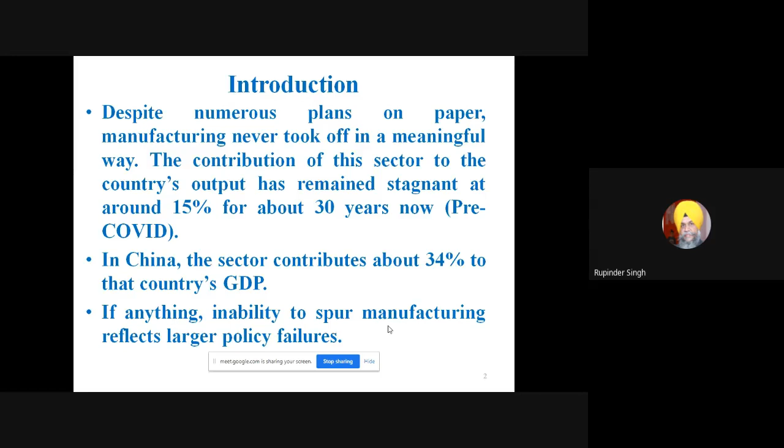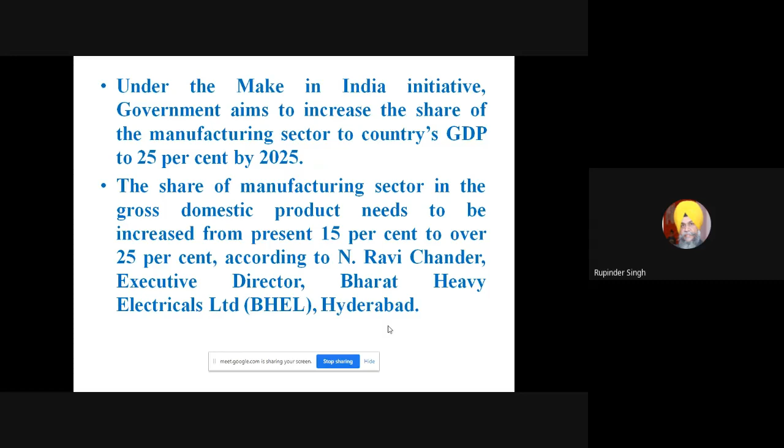To address this problem, in 2004, Government of India set up a National Manufacturing Competitiveness Council, and the idea was to increase the contribution from 12-14% to 25-35%. If you see the website right now also, the target is 25% by 2025, right? If we increase this contribution by 10%, it is expected that there will be 100 million jobs for engineers. Not only the government, but even the public sector and even the private sector people, they are saying that we have to increase the contribution of the manufacturing sector. Like one quote I have mentioned, from N. Ravi Chander, who is executive director of BHEL Hyderabad, he expressed that the contribution of the manufacturing sector must be increased from 15% to 25%, right?

But there are some issues. Let us understand. We have problems in infrastructure, with respect to finance, with respect to land acquisition, and labor law issues. Because of these hindrances, the big players are not coming, and we have a problem in investment.

Now this is the key point from where the further discussion will move. We are interested in some innovation. It may be through design, or it may be using some tools like 3D printing, which can help in product development or process development.

If I am developing this product first, I am developing the process first. This will help me in getting a lion's share in the market. Now let me give you one example before we actually start the business of 3D printing.

In our country, a lot of people move from one place to another for religious tourism. If you go to any of these religious places, you will see a lot of products that we want to purchase as souvenirs, as tokens of remembrance for our near and dear ones. This is a big business, and most places you go, in the pre-COVID period, most of the products were Chinese made.

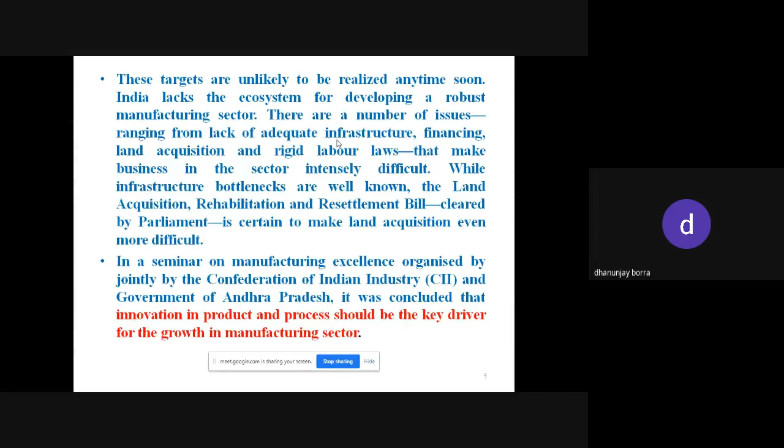Okay, so we were discussing. This is one of the data points I want to share with you. If you see the Thomson Reuters data, this was published earlier in 2014, and I have data up to 2020 also. We are contributing just around 5% to research as regards the international requirement is concerned.

Whereas China, Korea, and Taiwan are much ahead of us. Similarly, we say that we are good in CSE, but the contribution is again less than 2.5%. This is from a third party survey.

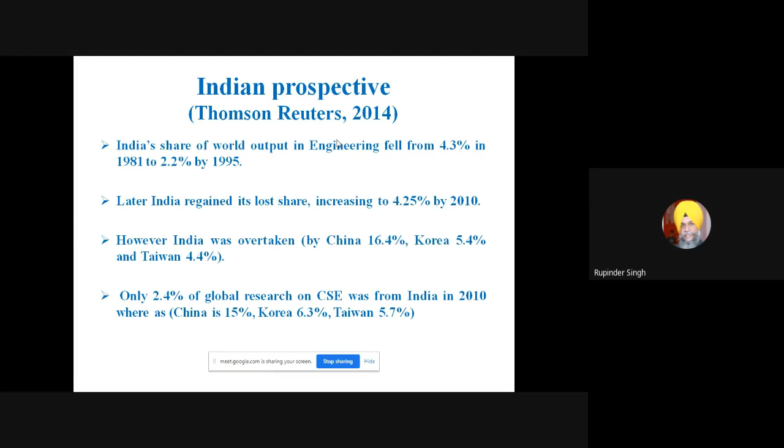So what we need to do is a lot of market research first, and then product development, prototype development. Then those persons in those particular products or industries will have a lion's share, who will launch the product first. So that is the idea of doing this.

Now, rapid prototyping can be one of the tools, or rapid manufacturing can be one of the tools, for helping me have a lion's share in the market. This is not a new concept; people have been using rapid prototyping since a long time back.

This is broadly classified into three types. I have taken this from the Chang and Chua paper, 2005, Journal of Advanced Manufacturing Technology. Rapid prototyping has been divided into three categories: additive, subtractive, and a combination of additive and subtractive.

Under subtractive, CNC machining is of course a highly established process. Then on additive, you can have a liquid based, powder based, or sheet based technology, and under these different categories, a number of commercial technologies are available. For some typical applications, we may also think of combining additive and subtractive processes.

So people normally ask, what will be the future of additive manufacturing? Somebody says that after 5 years, there will be a total shift from subtractive to additive manufacturing. But there are many good papers saying that both processes will go hand in hand, because even today additive manufacturing processes are still not developed enough for mass production activities like subtractive manufacturing. But in the automobile sector, it is expected that in the next 5 years there will be a big shift from subtractive to additive manufacturing.

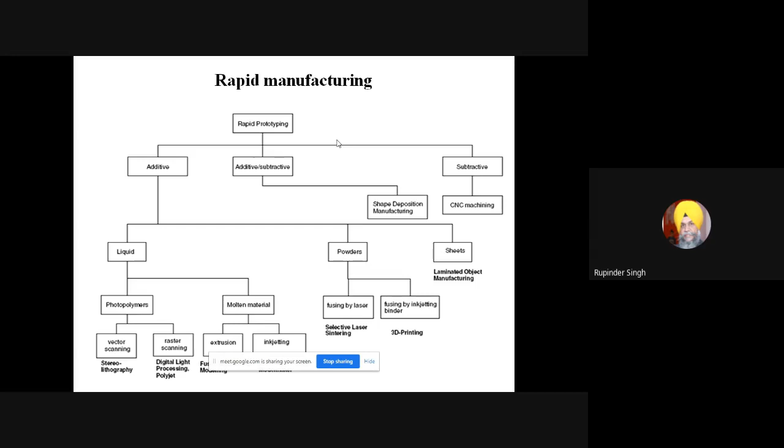My aim for discussion today is not to describe a particular technology, but to make this technology low cost as regards local needs, and the indigenization of the technology. All these technologies have been developed in the foreign world, maybe in parts of Europe, US, or other developed countries. But how can we make these technologies more customized and low cost, so that they can be really useful for local industry and local people for low cost manufacturing? That is the main aim of this discussion.

So basically, this is a method where I can make physical objects constructed by depositing material layer by layer. We have computer control data, a CAD file, which I transform into cross sections that are still virtual, and these are created in physical space one after the other till we get a finished model.

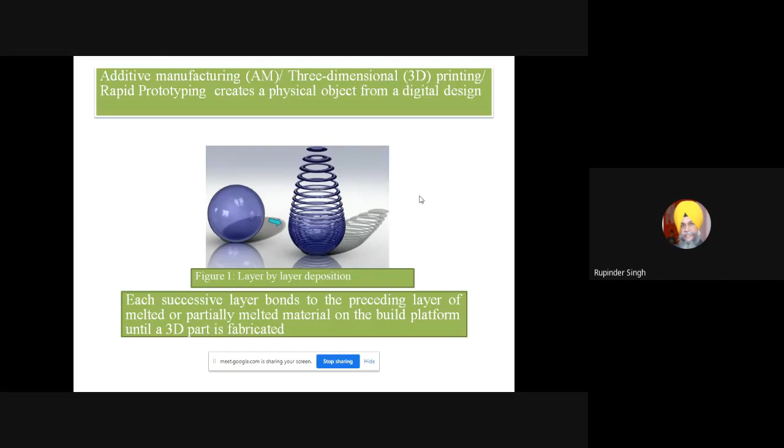So this is another way to represent it: layer by layer deposition of material, and finally I get a 3D printed part. Each successive layer bonds to the preceding layer, which may be melted or partially melted, on a build platform, till we get a 3D printed fabricated part.

Now let us think of the extension of this, which is 4D printing, 5D printing, or 7D or 9D printing. What can this be?

I have a technology through which I can print a 3D part. How did 3D printing actually start? If you look at the history, commercially people started developing 3D printing using an inkjet printer. In an inkjet printer, I have a nozzle, and from that nozzle some ink is put at defined locations following a Cartesian coordinate system. I give some command, and that ink, in powder form, is sprinkled on an XY plane. Then people used two nozzles in place of one.

From one nozzle, ink was sprinkled, and from the second nozzle, some binder was sprinkled. So a layer of powder, a layer of binder, a layer of powder, a layer of binder, was deposited that way. The platform, which we call the bed, over which this ink was sprinkled continuously, was lowered down. So layer of powder, layer of binder, repeated, and ultimately we get a final 3D printed part. This is one example of a powder based technology.

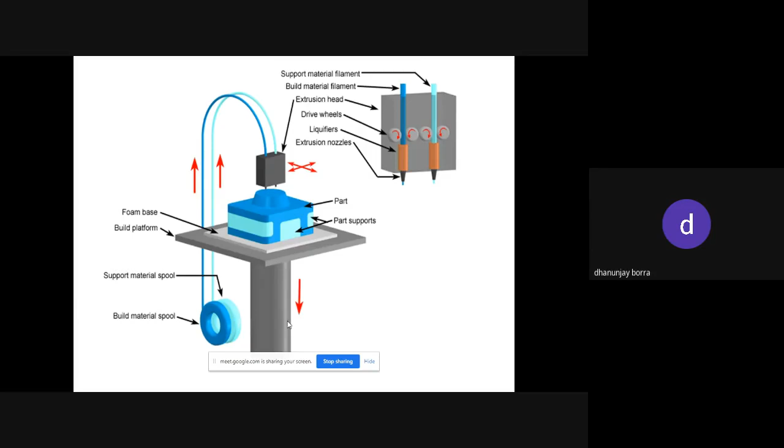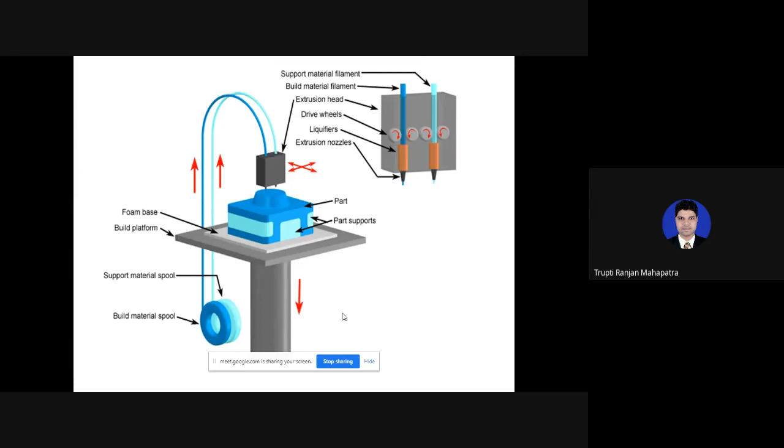Hello. Hello. Sir, sir, we are not getting you audible. Yes, yes, please hello, wait for a minute. Let sir know.

Is it audible? Yes, sir. Now it's audible. So where we left, actually, I'm not getting the response. That's why I asked.

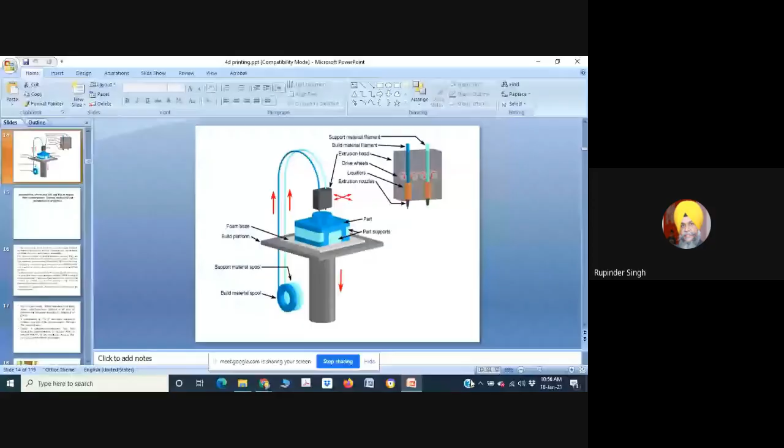Anyway, I'm again sharing my slide. Can you see this slide? Is it audible? Yes, sir. Are you comfortable with this slide now? We were discussing about shape memory programming. Have you heard about it, or should I repeat it again? Repeat it, yes sir. It's not audible, sir, and for this slide particular 4D printing? So this was audible, okay.

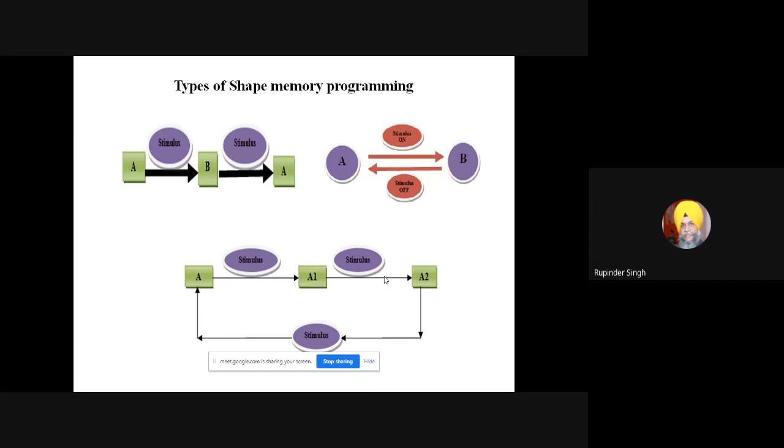Then we can have a two-way programming, where I change the material from state A to B with some stimulus on and stimulus off, like think of putting a bulb on and off. Then we can have a multi-stage programming in which I am changing from A to A1, A1 to A2. There can be different stimuli, and I can think of multiple stages. I will show you an example as a case study of how we can do this type of programming.

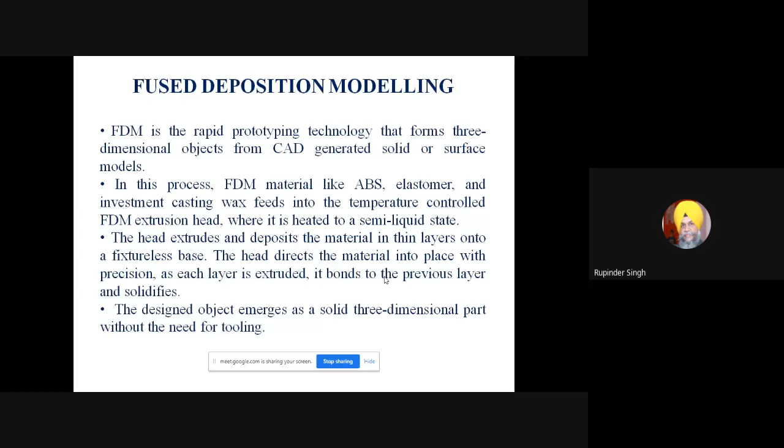So this is the first technology I am discussing with you. This is FDM, one of the very basic processes. What we have in this process is a setup using a spool in the form of a thermoplastic material, which is used as a consumable in this process. This thermoplastic spool is fed into a chamber.

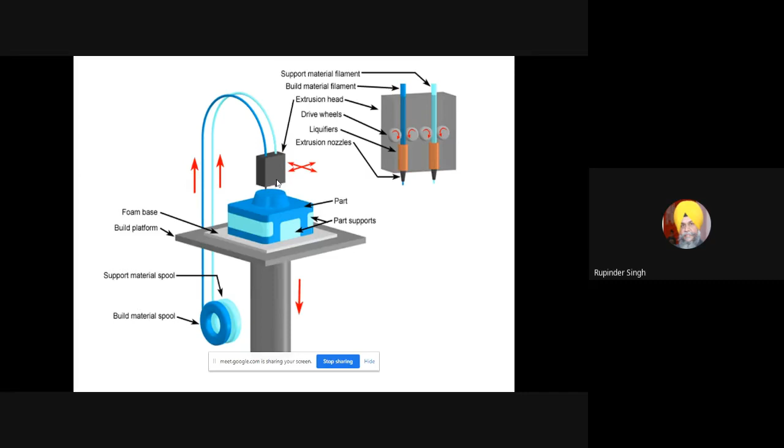Now you see this ABS and PA6. These are commercially used polymers, and a lot of people will say these thermoplastics are commercially available. If you go to the market, the common size of spool prepared by the extrusion process will be in the range of 0.5 or 1 to 2.5 mm, but the most common size for the commercial printer is 1.75 mm dia wire. This dia is the dia of the wire fed into the system. For the commercial printer, most commonly the 1.75 is fed in, and finally I get a very fine shape in the form of a thin strand, normally in the range of 0.8 to 0.2. So depending upon the nozzle size, I can have a fine strand of wire printed layer by layer to get this 3D printed part.

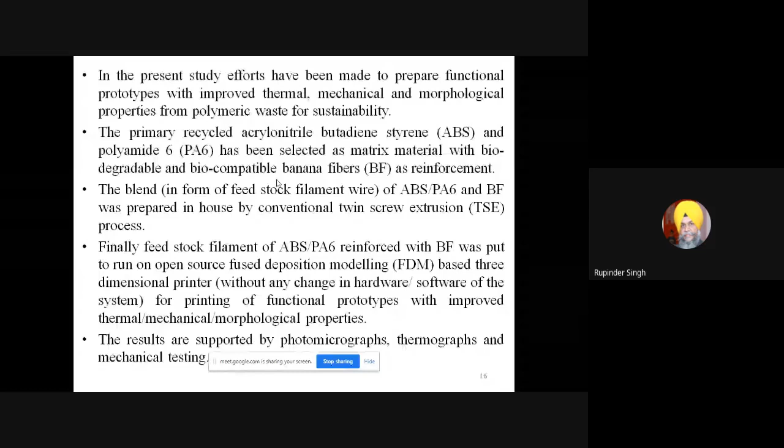In this example, what I'm trying to do is make my own spool with a reinforcement in this wire, so that it can be useful in line with the Make in India concept. I am interested in using agri waste along with polymeric waste to make our own spool. We observed a paper by Bahrain et al. 2016 explaining how to condition banana fiber. In some locations in our country, banana fiber is available as waste. As per this paper, steps were given for conditioning the banana fiber. We selected 1000 micron length and 100 micron dia cylindrical shaped banana fiber, which was reinforced in ABS and PA6 to make 3D printed wires.

Here I want to explain one concept of recycling. In line with 3D printing, specifically using a polymer, we talk about primary, secondary, tertiary, and quaternary ways of recycling.

In primary recycling, what we do is make some virgin materials, without reinforcement. For example, I have an ABS part, and the useful life of that part is over. What I do is some mechanical crushing, then put it into an extruder, do some heating over it, force that material through a die, and make a wire again. That is one way of primary recycling.

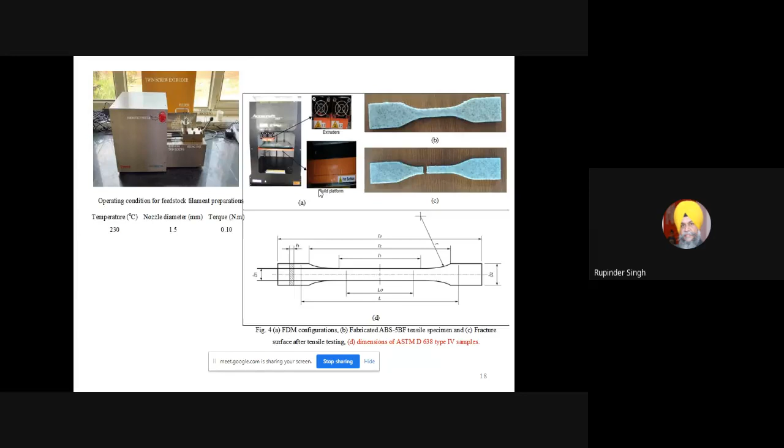For example, you go to the market and purchase a bucket. One bucket you put in your washroom, and another bucket you place on the rooftop. You will observe that after a few days, because of the aggressive environment outside, the bucket on the rooftop has developed some crack, because there is aggressive heating and then cooling. Whereas the bucket in a controlled environment in a closed room may not have any deformation.

So what I'm trying to explain is, with a particular type of reinforcement under different heating-cooling cycles, once my material is processed, how much deformation or how much loss there will be in the property we are interested in, with this type of setup.

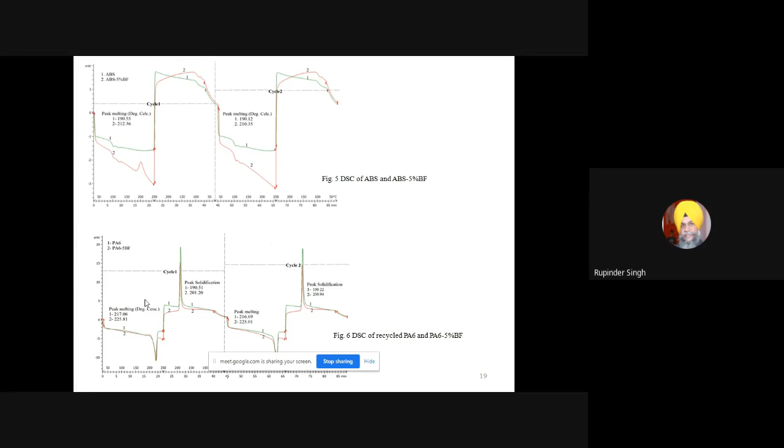Now, in our country at different locations we have different types of agri waste, and we can think of making our own feedstock filament, and print anything out of it as functional and non-functional parts. So we try to see some of the mechanical properties.

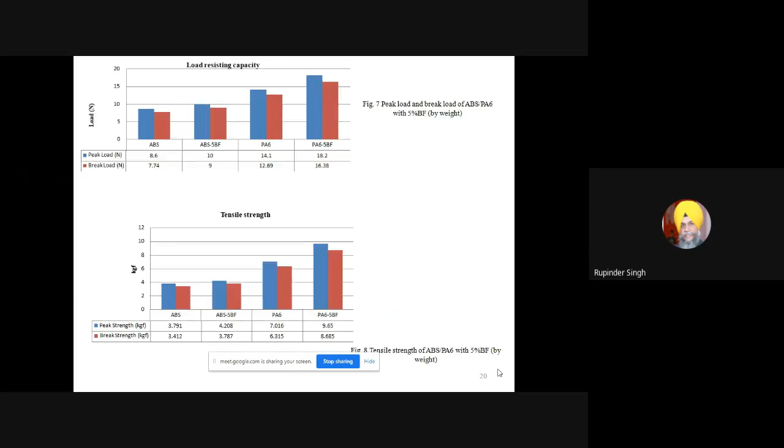Sorry for that, just a click of my mouse again. In this particular case, I think you can see it clearly. What we observed in that previous case, with the reinforcement, the mechanical properties like peak load, peak strength, elongation, and their microstructure, all these properties were significantly improved with this type of reinforcement. So from this we got one concluding remark from this case study: the fabrication of the consumable for my 3D printer is very much possible, and I can make it from waste and use it for some useful application.

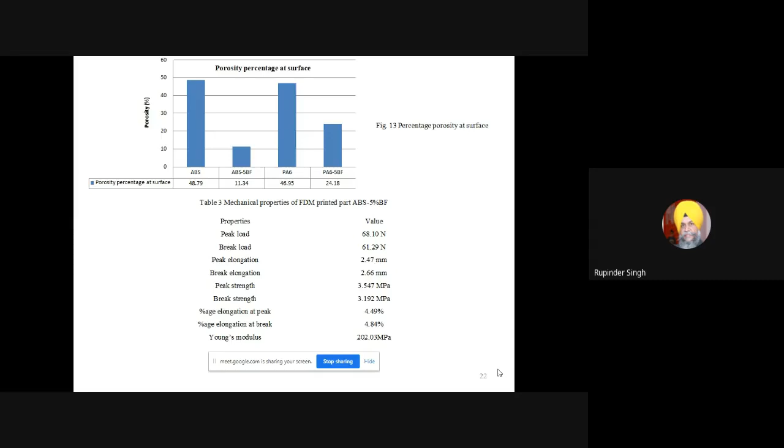Now this is the second case study in 3D printing. Then we will move to 4D, where we can basically use the setup for printing an energy storage device. So I will take this here. I am interested in developing some energy storage device in the form of a dry cell.

If you see a cell or battery, which is a common consumable in daily use for some domestic applications also, we call it an AA battery or a pencil cell. That is commonly used in our remotes, wall clocks, toys, and a number of other things. Once the useful life is over and that cell is not able to give me the required potential difference, normally 1.5 volts, we used to throw it away.

If you cut the cell, you will see it consists of four zones: a graphite coating, zinc chloride and ammonium chloride which form the electrolyte, a copper plate, and an MnO2 layer in between. Once assembled in series, we get the required potential difference because of the chemical process.

What we try to do is arrange this material in powder form and reinforce it in a polymer so we can use it for printing a cell. For this we have a standard procedure, and the first thing is to understand the rheology of the material, because if I understand the rheology, I can design that material for a typical application.

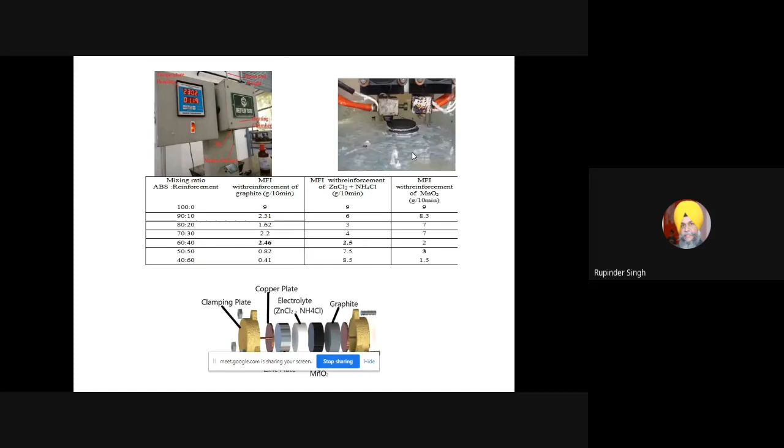So what we did is we assembled, but we were not able to get the output. You can see here is the assembly, here are some copper wires. To get some output, what we did is we dropped some quantity of acetone at the interface, so that if there is a hindrance by the outer layer of the polymer, it gets dissolved, and finally there should be a chemical reaction. So we were able to get the desired output.

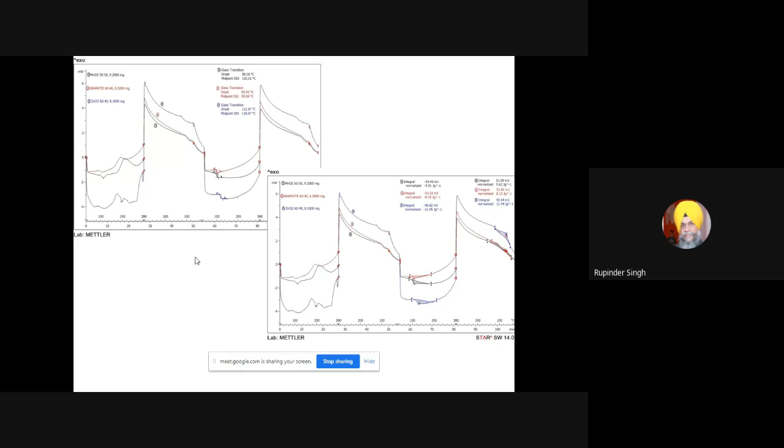But what is important, we observed out of this is, the cells that we printed, we did for the thermal analysis of that particular cell. What we observed in the thermal analysis, by working up to different temperature ranges, up to 95 degrees Celsius, this composite is stable. Similarly, up to minus 30, this composite was observed as stable. Now this is a great observation, because I can use this type of cell at extremely high or extremely low temperature, and secondly I can reuse 40% of the material as a consumable.

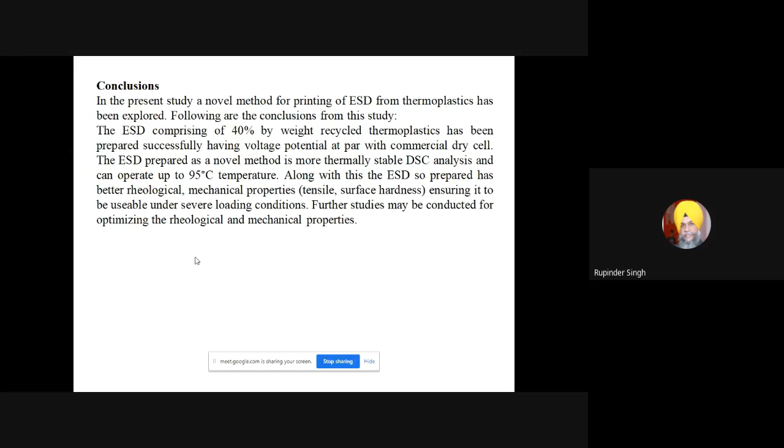So the thermoplastic material with a reinforcement, working at extreme high temperature, this is the beauty that we get out of these 3D printed cells. So these are the two case studies that I have tried to explain about the use of 3D printing for developing our own in-house based material as an innovative part.

Now let us have a case study for 4D printing. Let us understand the concept by developing our own stimulus with a simple example of the physics. Now what I am doing is, I am printing multiple layers in such a way that I have a conducting and non-conducting set of layers.

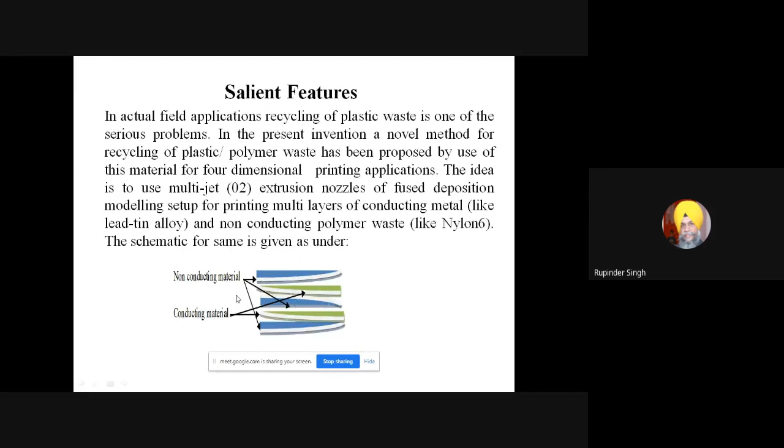So what I am now trying to do is, I am trying to print.

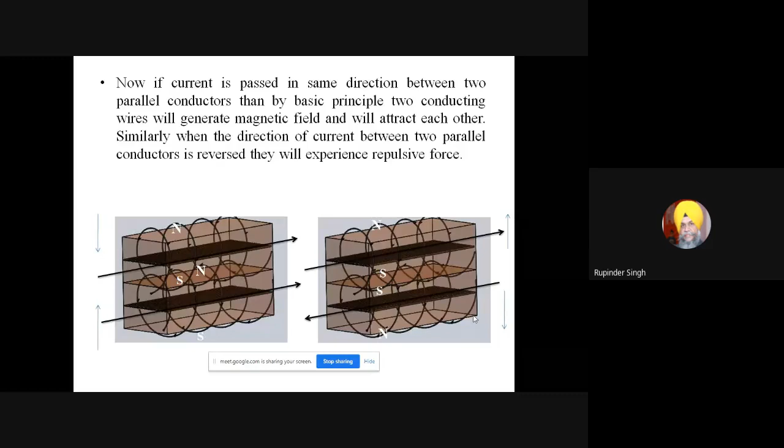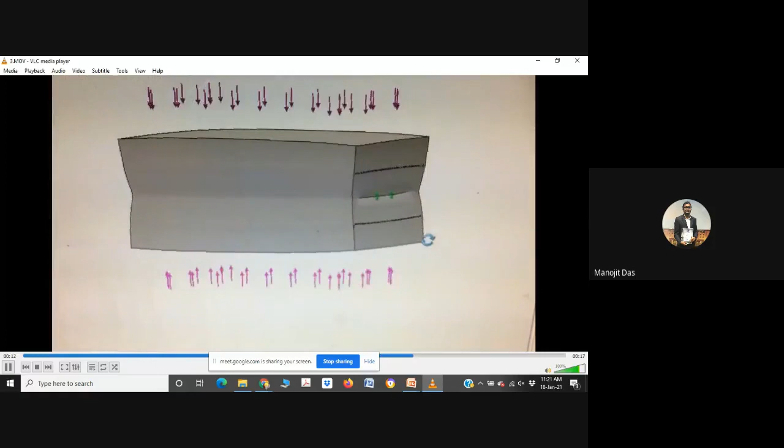Sir, hello sir, now it's not audible. Excuse me sir. You can see much more clearly the details of the black face. Not audible sir, please unmute yourself. Is this clear to all? Yes sir. Now it is audible. Are you able to hear or not? Yes sir, now it's audible. Is it audible? Yes sir, now it's audible. Yes please, is it audible? Yes sir, now it's audible, sir. Are you able to hear me? Yes sir. Are you able to hear me? Yes sir, I think your end there is some technical problem. Right now can you hear me? Yes sir, okay. So I will continue. So are you able to see that video? No, sir.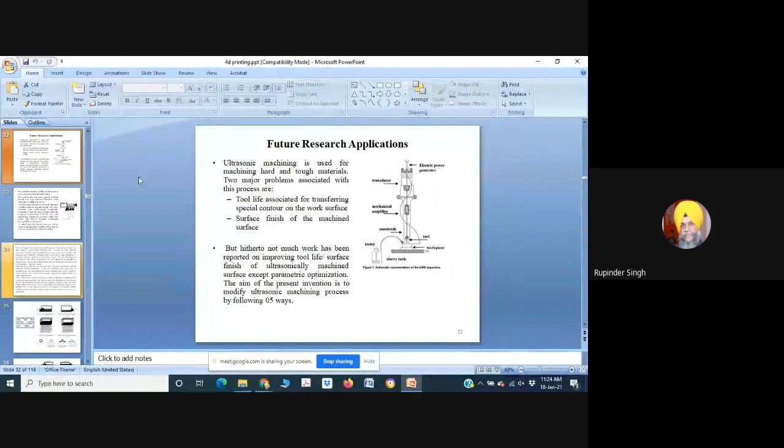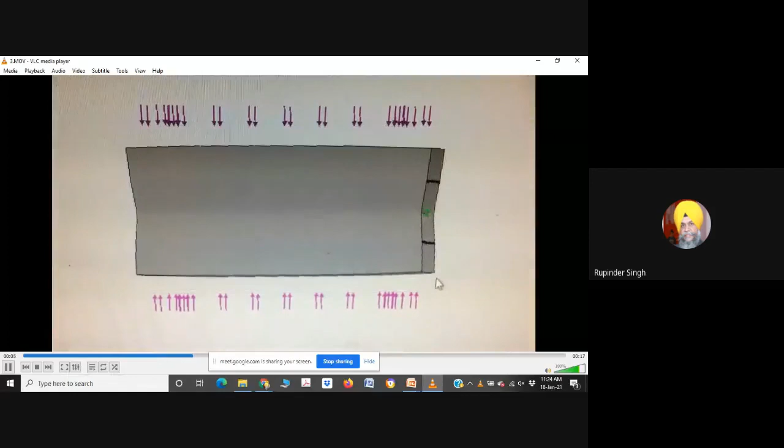Okay, I am again showing that part so that it may be more clear. So here is the 3D printed part I am trying to show. I am interested to print some part layer by layer, and in this video you can see the effect of the transducer, with multiple layers, a flow of current in a parallel direction and in a counter-parallel direction. So we were able to 3D print that part, and this is basically helping me achieve the 4D property.

Now in this example, what I am trying to show you as a 4D capability of my material, I am basically using the material as a combination of ultrasonic machining with a broaching process together. You may be knowing what the ultrasonic machining process is. In a typical USM process, I have a transducer, and I am interested to put this material over this as a transducer. Then I have an amplifier, and a tool which is not in contact with the workpiece, and some slurry is flowing between the gap of the tool and the workpiece, with a replication of the tool profile over the workpiece.

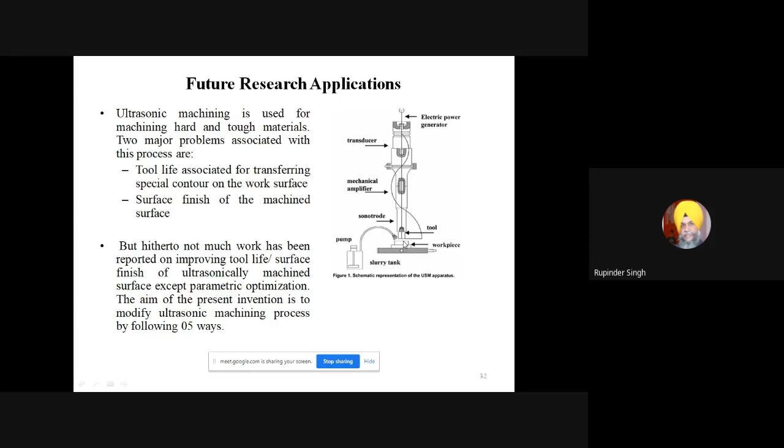What actually we are doing through 3D and 4D assisted printing is, in a typical tool, I am basically making the tool in three parts. In the first zone, I am making it with a polymer up to zone 1, which is the roughing zone.

I am using a coarse size of alumina. Then in a semi-finishing zone, we are using a relatively fine particle of alumina, then in the super finishing zone, a very fine abrasive of alumina. Once the tool enters through the ultrasonic mode, it will perform the drilling operation, combining broaching with ultrasonic machining. This is one of the patents we hold on this particular USM application.

Similarly, you can think of hybridizing with EDM, or hybridizing with magnetic abrasive machining, and different other types of applications.

This is another innovative design aspect I want to share with you, important in 3D printing. Once we go for 3D printing, normally we have a circular nozzle, and because of this circular nozzle, the output layer comes in the form of an ellipse. This is basically called the Barus effect. If I print my part, it will result in an air gap between layers.

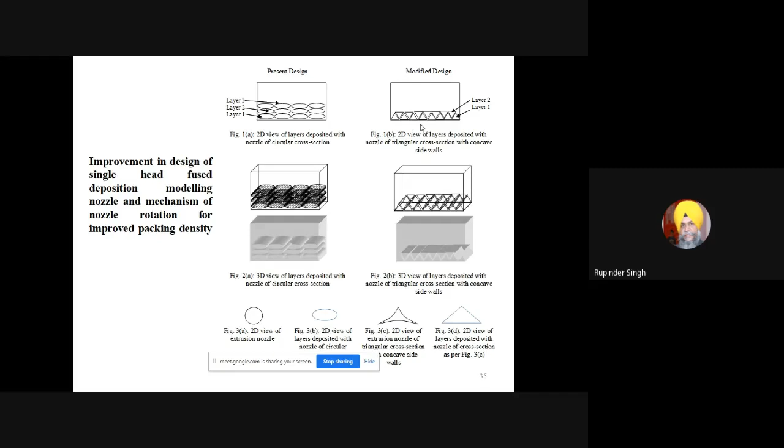In the second layer, I will use a stepper motor to change the direction of depositing, putting inverted triangles. Now the air gap will be less. So finally, by just playing with the nozzle design, I can get different air gaps, and control the surface finish of the part.

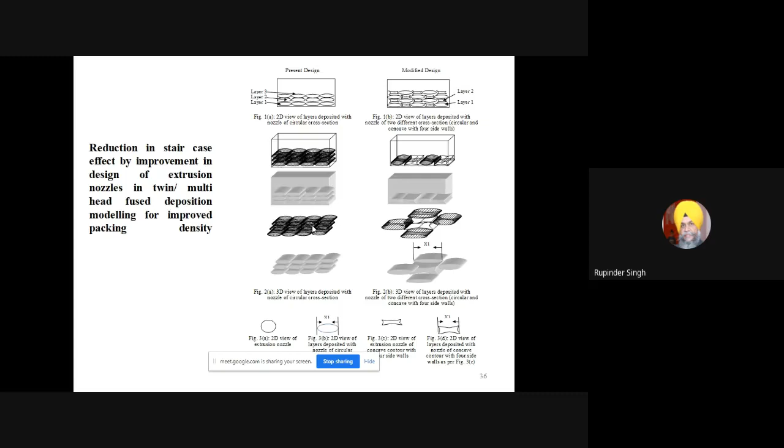Similarly, with multiple nozzles, you can put layers in a way that gives better compactness as well as a higher production rate.

Now I am going to explain a case study about 4D printing for a typical structural engineering application. This is one of the projects we are doing under a DST sponsored project. Here I am interested in a customized solution for heritage structures. This is one of the heritage buildings selected for maintenance using a 3D printing tool.

The problem is, suppose I have a heritage wall, and one side is accessible to me while the other side is not, and there is a cavity like this. If I have a cavity to fill, I can use an epoxy-based solution. There are companies like Hilti, an international company, which can help fill this type of cavity. This is an epoxy-based adhesive type solution.

Now there is a second case: once the entry size of the cavity is large but the rear side is small, you can still fill the cavity like this. But there is a third case, where the entry is small and the cavity at the rear end has some intricate shape.

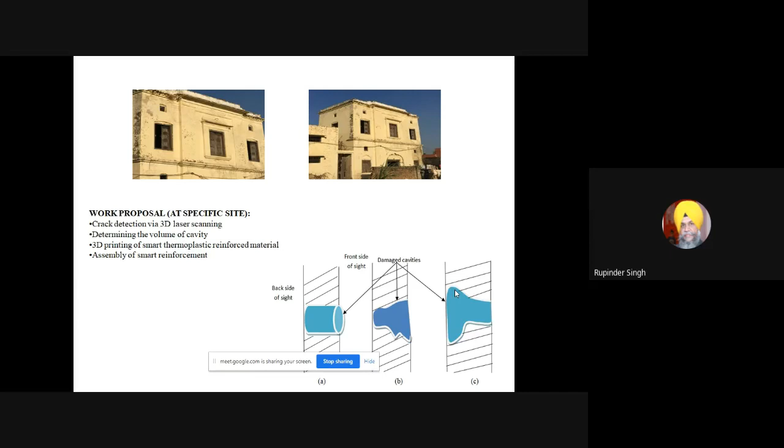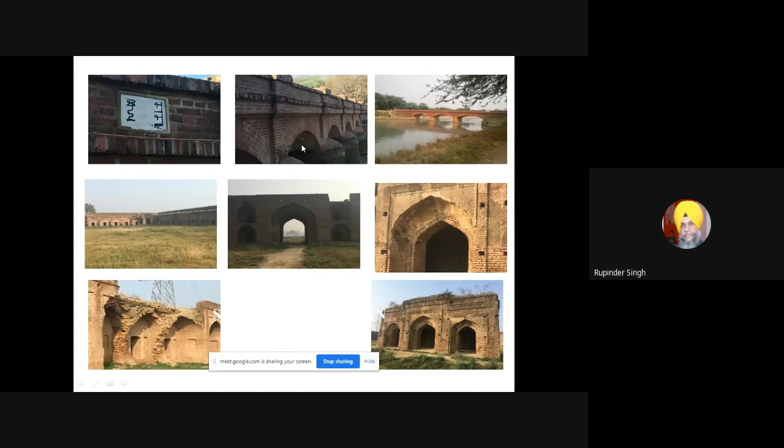So we are interested in making some smart solutions. Now, typically in these bridge structures, you see here we have a typical curve structure. Right now, the whole structure is of a single composite material, but this lower section is under compressive load, whereas this outer section is under tensile load. But what we are doing is using a simple single solution for this type of structure. So we are interested in a smart solution for these type of structures.

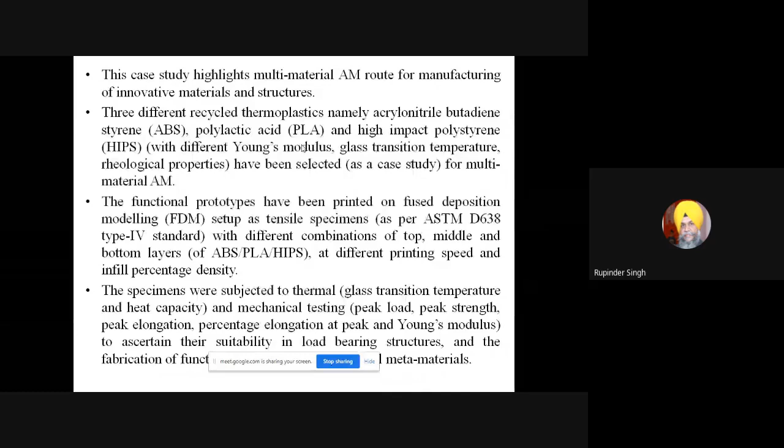So in this particular example, to put our point, we selected three different materials: ABS, PLA, and HIPS. These three materials were selected because they have significant differences in their properties.

So we tried to see how they behave on a 3D printer. We selected some fixed parameters, using one open source 3D printer. We fixed the diameter of the nozzle, diameter of the filament, layer height, number of layers, filling pattern, printing speed, travel speed, and extrusion temperature. There are around 15 parameters that can be controlled on this type of commercial printer. Some of the parameters we kept fixed, and we tried to explore the effect on the output property.

Here, for some of the experiments we put ABS on top, for some we put PLA on top, and for some we put HIPS on top, and we followed some DOE - it may be Taguchi, RSM, any DOE you can think of - and then we try to see the effect.

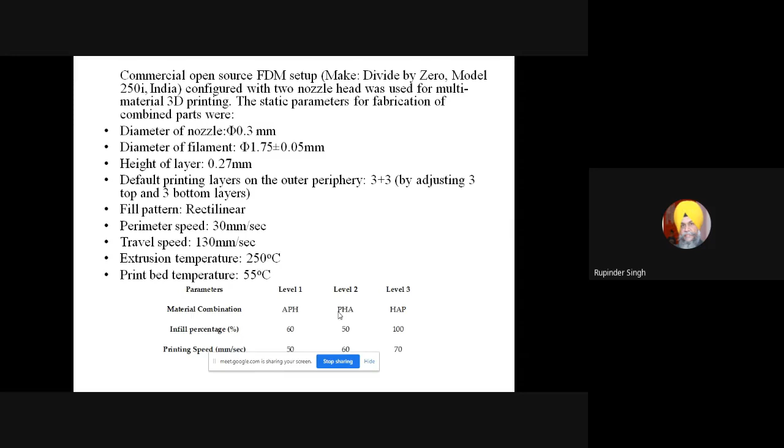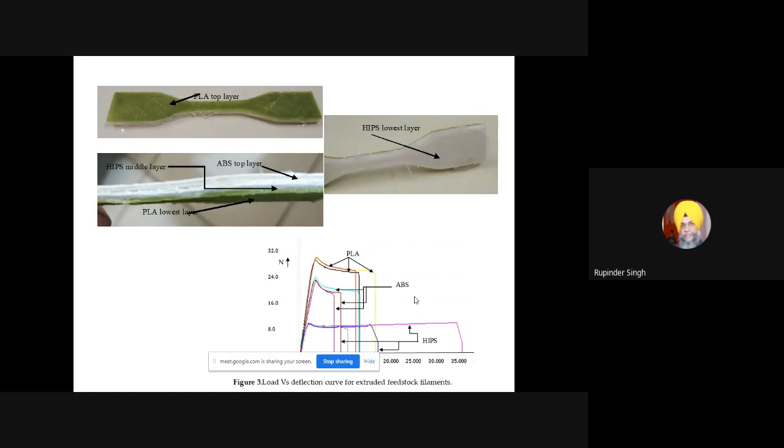Now you see here are some of the tensile coupons that we tried to print with different phases, like PLA on top, then ABS on top, then HIPS on top. Now you can see this is a typical stress strain curve that we developed with a single material - this is for PLA, then ABS, then HIPS. You can see the area under the curve, which gives the modulus of toughness, basically responsible for the impact strength of that particular material.

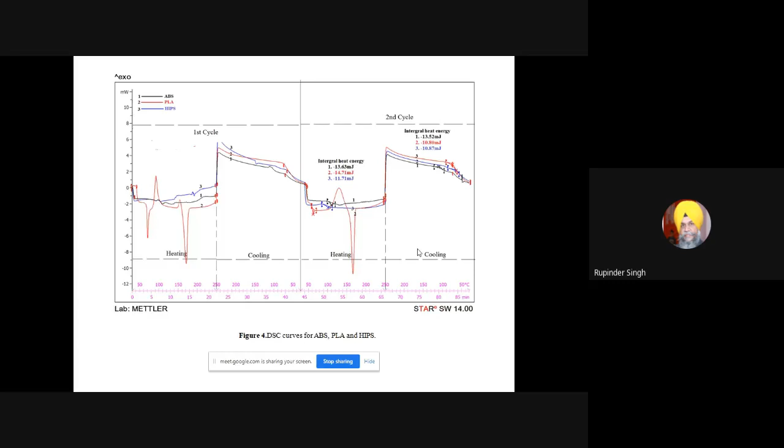Like in our previous case for establishing smart materials, we tried to see their thermal properties. You can see for ABS, in the heating cycle, it was absorbing around 13.63, but in cooling it was releasing almost the same. Whereas for PLA, there was a loss in property - it was taking 14.7, but releasing 10.8, so there is a property loss. Similarly, for HIPS, this was almost in an acceptable range. So we can see that PLA is definitely going to degrade, so we have to be a little careful in selecting a particular proportion for this type of analysis.

Then, based on some DOE, we tried to print different parts, and you can see the stress strain curve for the different materials that has been observed on a standard UTM. This is really important for beginners.

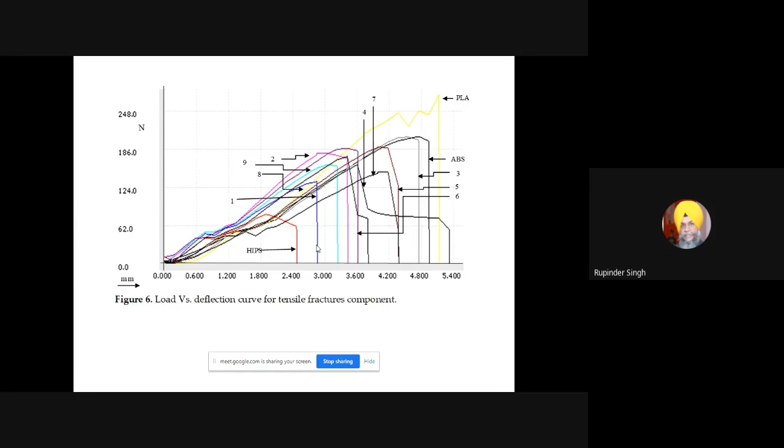Now if I use the proportion explained in experiment number 1, it must have a loss in the property. I can always correlate this with my stress-strain curve. For experiment number 1, I have a minimum area under the curve, which means the strength of the part is lower for this case, in which HIPS was on top, PLA was sandwiched between the HIPS and the ABS — I must have a loss in the property.

So as a mechanical engineering application, for this type of sandwich material or multi-material, I can think of selecting a particular material in the middle, or on top, or arranged that way. Accordingly, I can always correlate this with the optical microscope-based photomicrographs as well as with the tensile properties I have achieved.

So one thing I can say is, using innovative 3D printing, I can think of multi-material printing to improve the properties. Here are some of the conclusions.

For pure HIPS, the peak strength is 4.21, whereas once we have multi-material printing, the overall composite resulted in an improved strength of 10.78. So you can think of this type of strength in the compressive mode, in the pull-out mode, and then in the tensile mode — different modes you can think of.

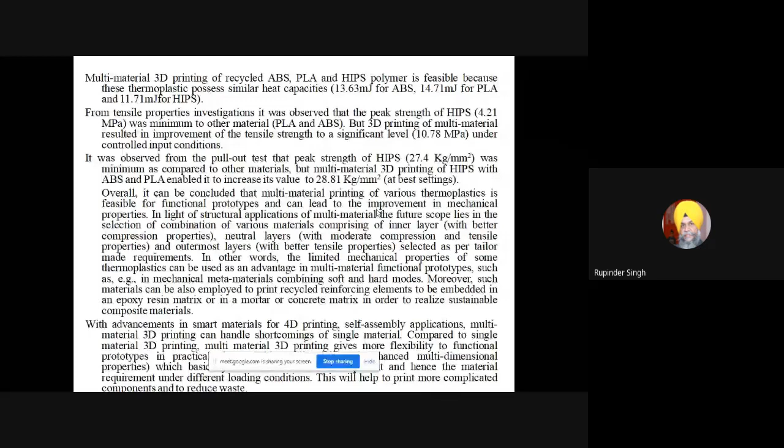What we are interested in is printing a sort of coupon or rectangular strip, filling inside a cavity in which the top layer requires tensile property and the inner layer requires compressive property. I can think of these types of combinations, and add different types of smartness to my material, which will help in attaining 4D capabilities.

Similarly, there is another case study I am interested to show quickly — this is for dentistry, for typical 3D printing. Here, for 4D application, what we use is nano HAP particles. This HAP is selected from kitchen waste — eggshells — which have HAP particles, and the 96% composition of those HAP particles is very much similar to our human teeth.

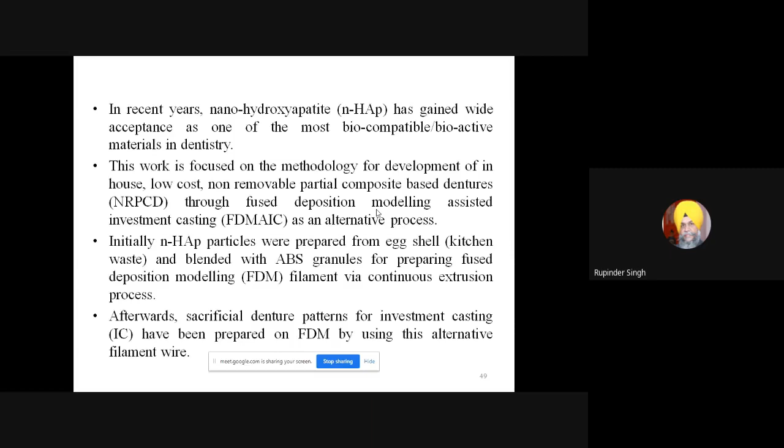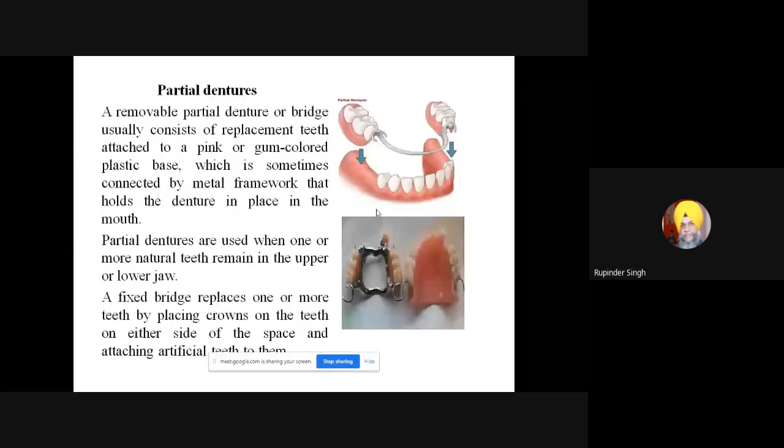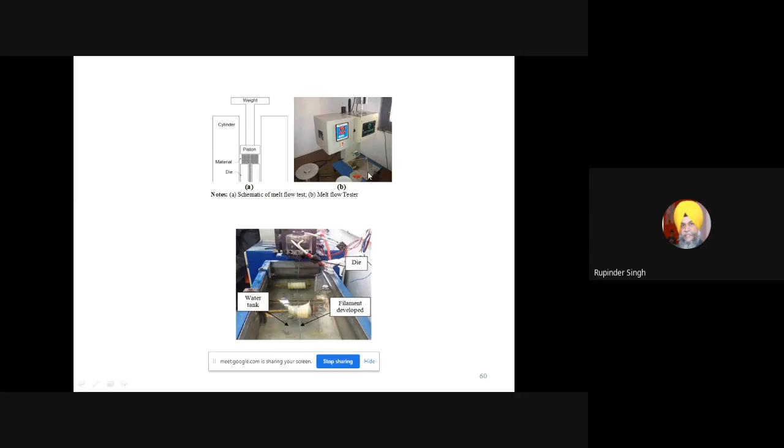So we prepared the feedstock filament that way and tried to use it for printing crowns. This is some historical background we can leave — typically we can design a denture, a mandible or maxillary teeth, and using the traditional way of making teeth, I can make it. We followed a similar way: prepared the feedstock filament, printed the wire, and finally printed the crowns. Here the only difference is the reinforcement of HAP particles.

Now these HAP particles have a capability of self-growing type of behavior.

So basically they give a platform over which osteoblast cells can grow. Finally, if I make a crown of this type of material, initially I have to put some adhesive, but after some time this will be having a self-adhesive type nature, because some natural type growth will be there. So we can think of a self-growing capability for these types of dentures, making it more compatible with human requirements, because of the self growth, adding the fourth dimension into the 3D printed part.

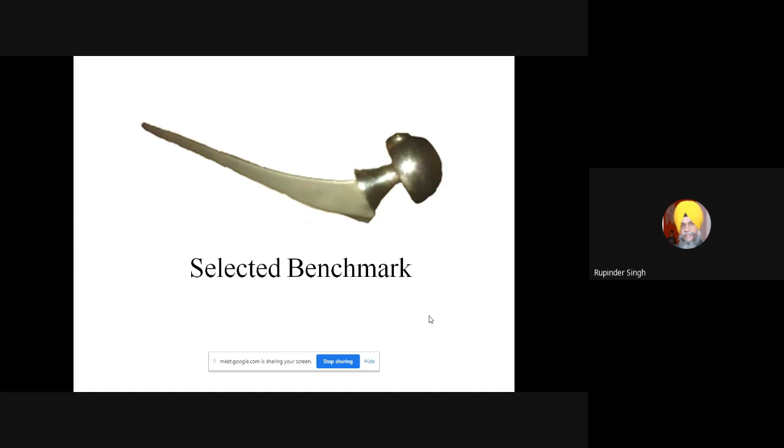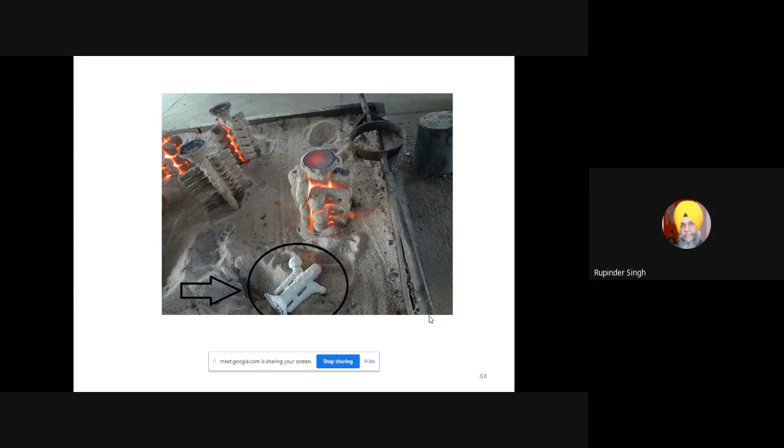Then we can think of applications in orthopedic. Here some orthopedic implant has been prepared, similarly using 3D printing, I can think of making a polymer based pattern, making it as an investment casting tree, then using a slurry coating. Then like typical investment casting, we can think of putting it in a heating environment and removing it in a dewaxing stage, then adding a casting into it. Now this is something conventional. Now what will be the 4D part over here is, here we have one of our patents within this process.

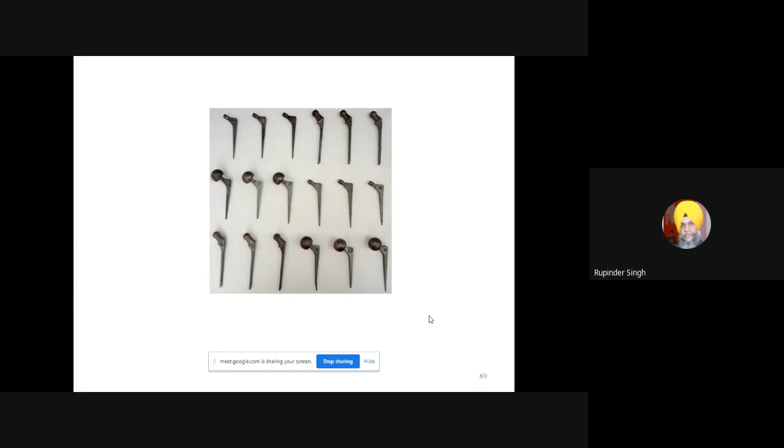What we actually did is we tried to have some reinforcement of material in the form of HAP particles, put into the polymer part, because these HAP particles can withstand high temperature, as they are ceramic type materials. So I can think of making some functionally graded material, a layer by layer material approach, in which different layers have different types of properties. So we patented one process called FDM assisted investment casting, in which the reinforcement was controlled for these type of material properties, and then we try to ascertain their grain structure.

Now this is another example to put our point of self-growing. Here what we have done is we did the reinforcement of PLA with hydroxyapatite and chitosan, and we try to make some feedstock filament, you can see over here. This hydroxyapatite, as I already explained, helps to grow the tissues, and the literature says if I can print the material with reinforcement of 8% hydroxyapatite, which is one of the kitchen waste from eggshell, and chitosan 1 to 2%, this helps me in better biocompatibility. So we try to prepare these types of feedstock filament.

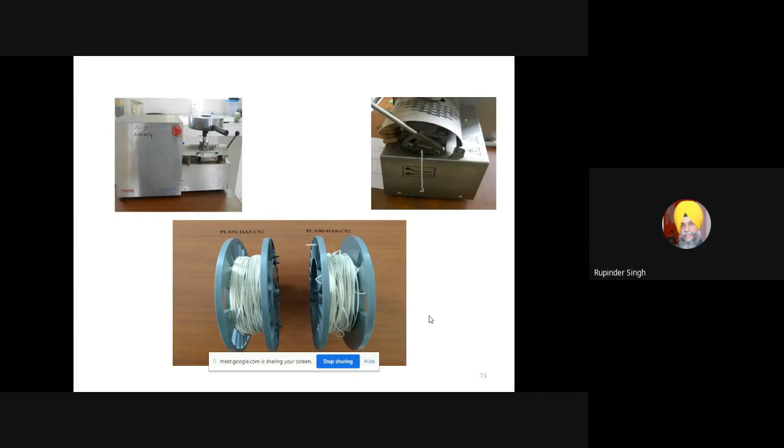We try to do their thermal analysis, how they are behaving with different levels of reinforcement, and try to see their microstructure in the SEM. What we observed is we got an open, porous, and fibrous structure, and they were giving us a good opportunity to have an interwoven type structure. This has a typical application in biomedical, specifically in veterinary as well as human patients.

Once we are interested in the replacement of some bone type parts, once there is breakage of the bone, or because of a trauma patient, some accident, some bone part has been lost, we want it as a replacement of the part, and we can think of using biocompatible PLA with the reinforcement of HAP and chitosan. Normally the PLA will come out from the body with no harm to the body, and the HAP and chitosan will help in growing the natural bones. So this is again typically a 4D application for the biomedical.

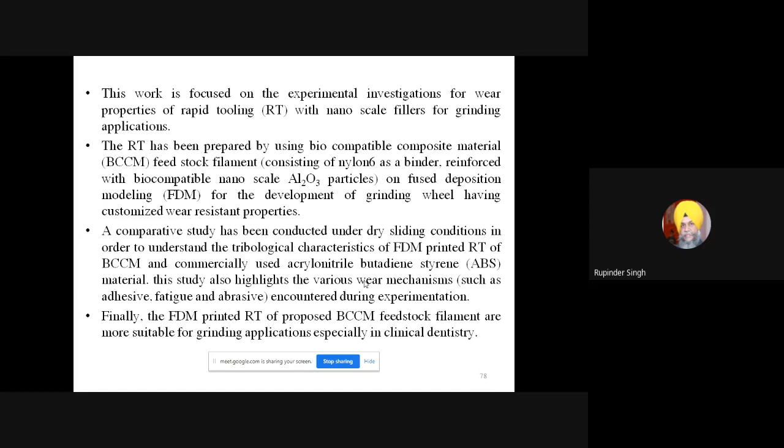I can think of using this type of material for tooling also. Like I have already explained, we can think of making a wheel, we can think of a reinforcement with different types of ceramic materials. In this particular example, for clinical dentistry, we try to prepare some inserts in the form of pins, with some Al2O3 reinforcement. So we try to see their wear mechanism, and as a typical production engineer or manufacturing engineer, you can always think of making your own insert sort of things, and then have a wear property comparison.

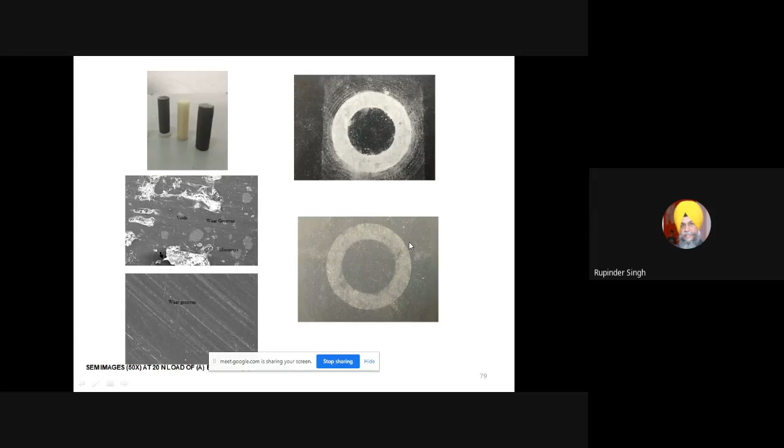Some wear tracks have been developed. So without reinforcement, you can see there is a thick wear track, and with the reinforcement, the material loss was less. So some discussion we can think of on the wear mechanism, and then one of the important things over here is using this type of material as a stimulus for some typical application.

Before I conclude my talk, I can think of using this type of material for medical application, for structural application, maybe for typical mechanical engineering application, as a live example of some 4D part.

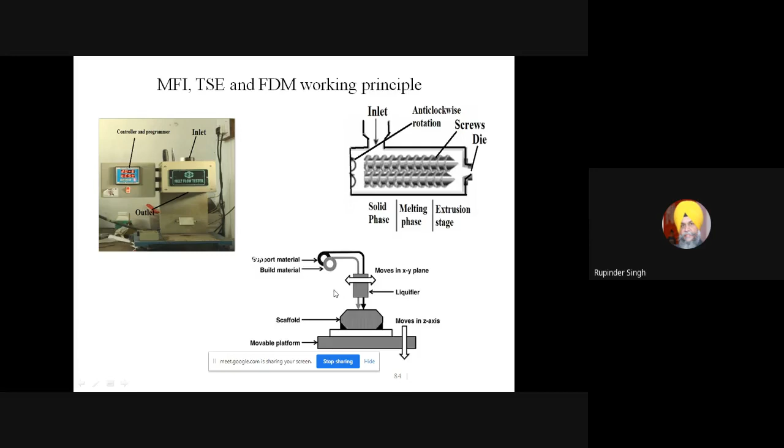So to understand this, let us quickly see this. Firstly, I have to establish a rheology. Then I have to prepare a feedstock filament using some extrusion process. Then some printing of the part is there. In this particular example, we are using PLA, PVC, a magnetite powder, and a wood dust.

Why am I showing this case study? This is one of the works that we have done with our collaborator. We are interested in developing some in-house cabins where the temperature outside is -40, and we want to conserve heat, typically in some parts of Canada and US, and we want to reduce the timber or wood requirement because of the depletion of natural resources.

All of you may know that PVC paneling is very commonly used for decorative purposes, but once the luster of the PVC is gone, we have to just throw it out. This adds to the plastic solid waste management problem. So what we did is we selected PLA as a biocompatible polymer which was reinforced with PVC, to have properties like wood. So we used wood dust, and to have some magnetic effect of a self-assembly nature for 4D, we reinforced it with some magnetite powder.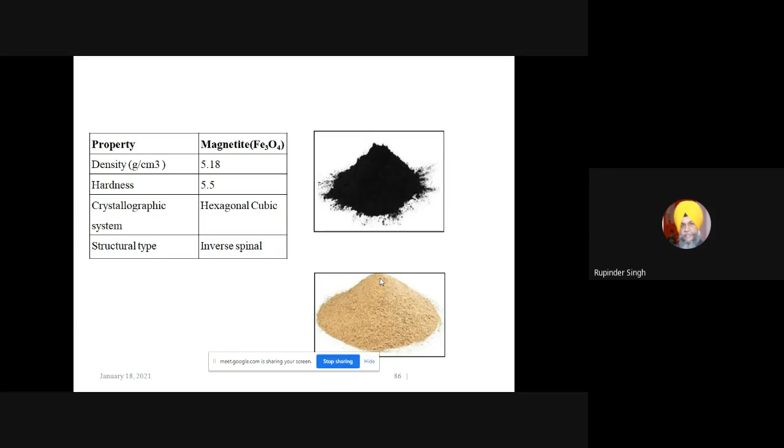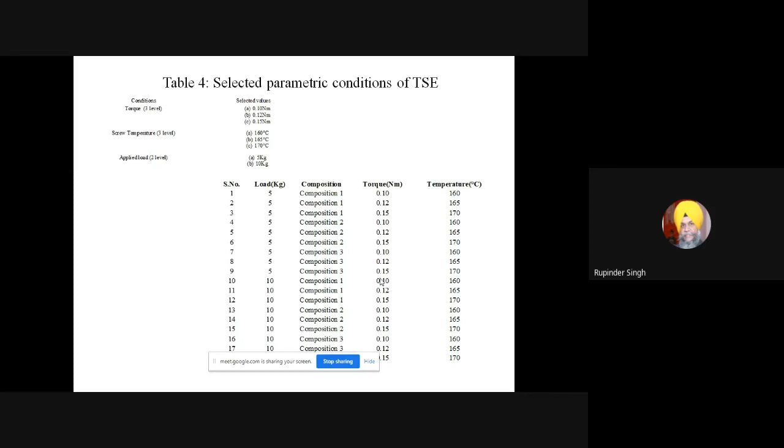Based on this, we selected different compositions of the material. Based on the composition, some parametric optimization using DOE on a twin screw extruder was made. And now this will be really important to see.

We are interested in some of the magnetic properties. Here I am interested in magnetization, coercivity, and retentivity. Basically, I am interested in using this magnetic field as a stimulus so that I can have a better BH curve, so that once I print some part, I'm interested in printing a tile.

Just imagine I have a frame of metal in which the metal wires are there. If I give a particular current to this, the whole section will get magnetized because of the electromagnetic waves. Now if I put a printed tile over here, it will stick to this. I will put a particular number of tiles, and then do the screwing operation, the fastening operation, and then I can switch off the electric field, but I can have a permanent assembly. After a few days, if I'm interested in some other shape, I can again switch on the power, disassemble, and think of a new assembly.

For that purpose, I am interested in how much quantity of magnetic field will be required, how much coercivity will be there. Magnetization is how easily I can magnetize. Then if I switch off the magnetic field, how much retentivity it will be having once this magnetic field is over. The coercivity is the value that is required; if I change the direction of the magnetic field, or make it zero, how much opposite direction magnetic field I have to apply. So these are the three things we observed from this BH curve.

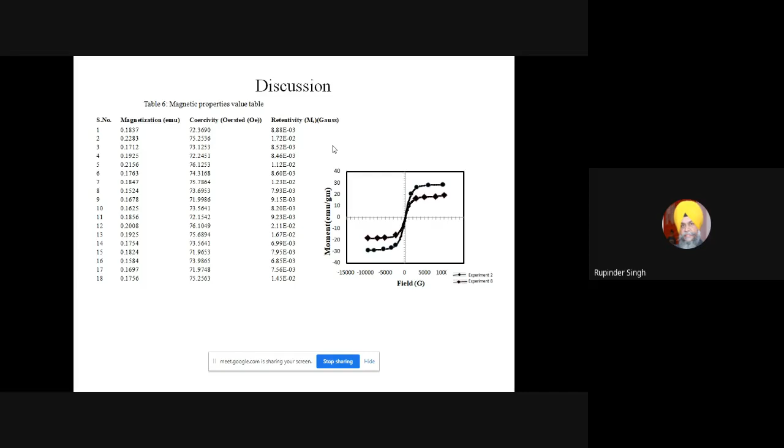Based on this, we did some parametric optimization, then some EDS-based analysis for this type of material, and we tried to have a single blend and multi blend material.

In this typical example, you can see for a selected grade of PLA, with repetitive observation, I was able to get the MFI in the range of 28. For PVC, it was 25. So we tried to reinforce different quantities of PVC in PLA, and a particular reinforcement level was selected. Similarly for Fe3O4 reinforcement in PLA, in a single blend and multi blend, different numbers of experiments were tried, and we tried to ascertain their peak load, peak elongation, break load, break elongation, peak strength, break strength.

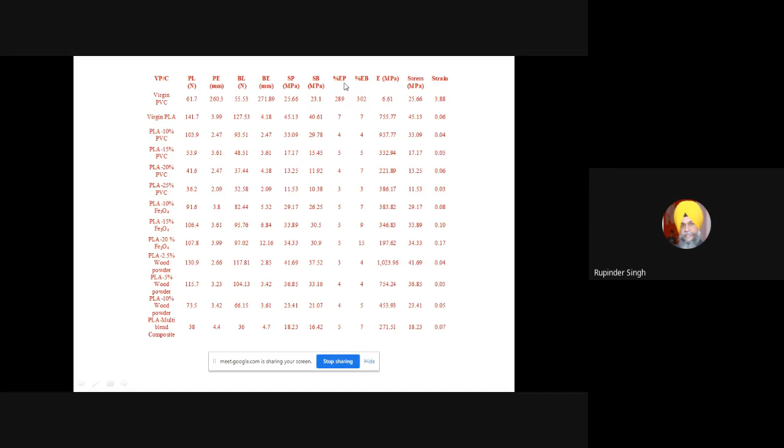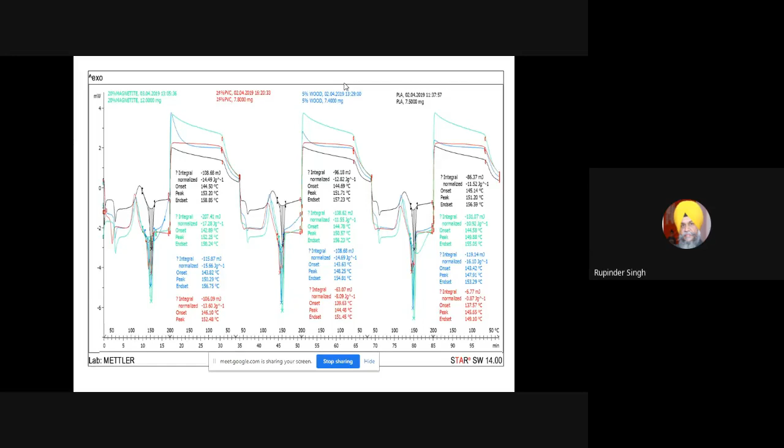Young's modulus, modulus of toughness, these type of things for the different compositions. We tried to develop stress-strain curves, their hardness, and like our previous case, the thermal analysis - how this particular material behaves under the effect of varying temperature, in different heating cooling cycles. So these are the observations we tried to make, and based on this, we can think of different smart materials for typical 4D applications.

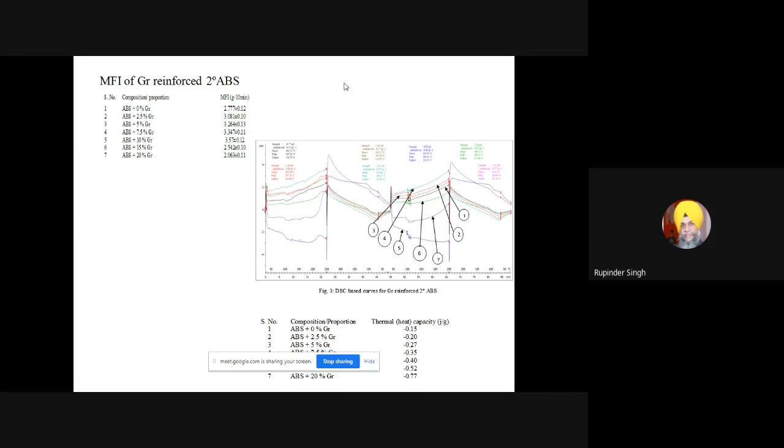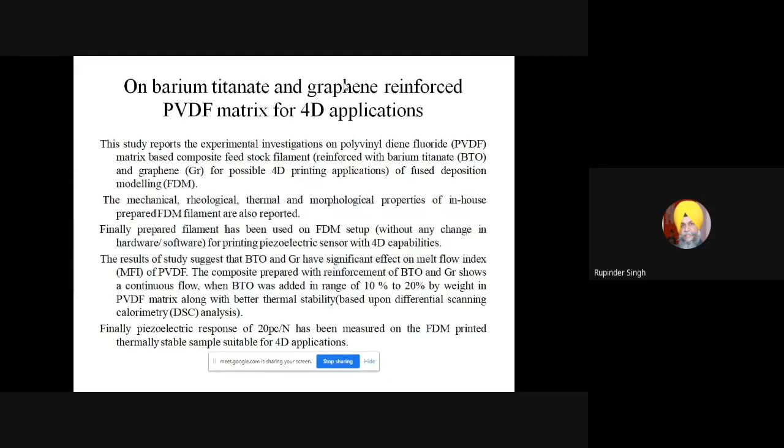We can think of reinforcement in ABS with graphene. I am interested in different types of materials and how they behave - their flow properties, thermal properties, magnetic properties. Similarly, for materials like PVDF and barium titanate, these are piezo property materials, and we study how they behave under different applications, magnetic fields, and thermal conditions.

We try to ascertain how much piezoelectric property, in form of D33 constant, volumetric change it can absorb. For a typical engineering application, we try to ascertain all those things.

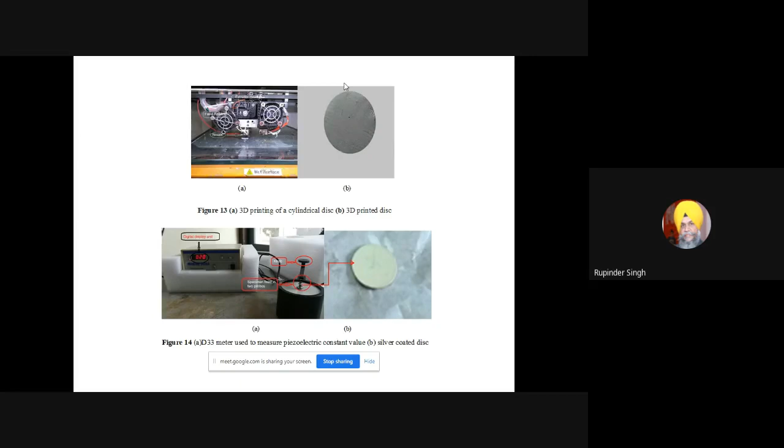Before I conclude, the last thing I want to discuss is a single step process - take a polymer, add some reinforcement, like in this case ZnO was reinforced, wire was prepared as feedstock filament, and we did thermal analysis depending upon composition. We printed a U-shaped component and tried to see the effect of temperature and water together.

We tried two stimuli. One was water - we put it in water for 5 hours, then removed it and tried to see what volumetric change occurred in that material. We also examined the effect at 25 degrees and at 40 degrees Celsius temperature.

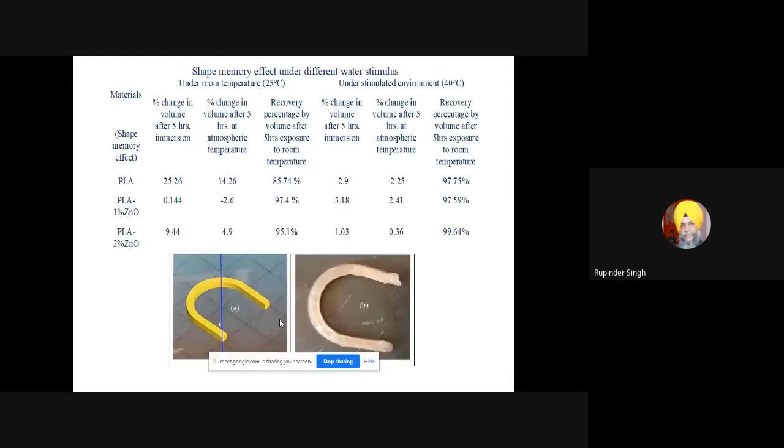We observed that for a particular composition, a particular type of stimulus behaved in a better way, and we examined the effect at different temperatures. We were able to get up to 99.9% change in the recovery - meaning there is a change in dimension - and with a different stimulus the recovery was up to 99.9% in some cases.

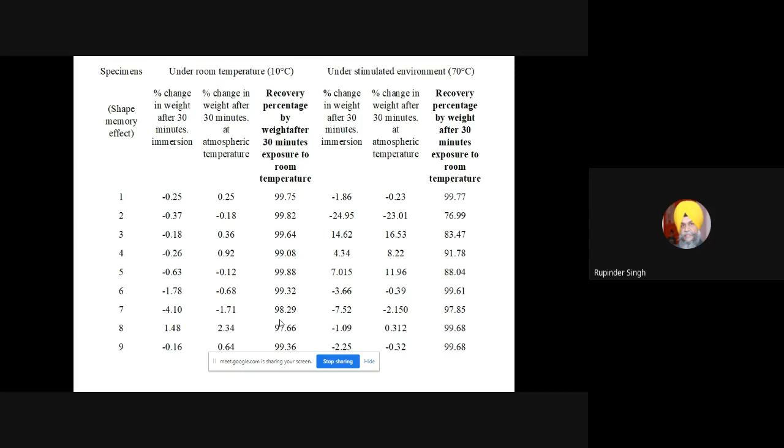We tried to correlate that recovery with the microstructure, and tried to see why this recovery was good in some cases. This has been correlated with the porosity level of these materials.

This is the overview I've tried to give you for different 3D and 4D applications. Now you can think of any application in different areas, and if I know the stimulus - a single stimulus or combination of stimuli - I can have customized properties. I think I've gone a little fast, but I've made my point using these 3D and 4D applications.

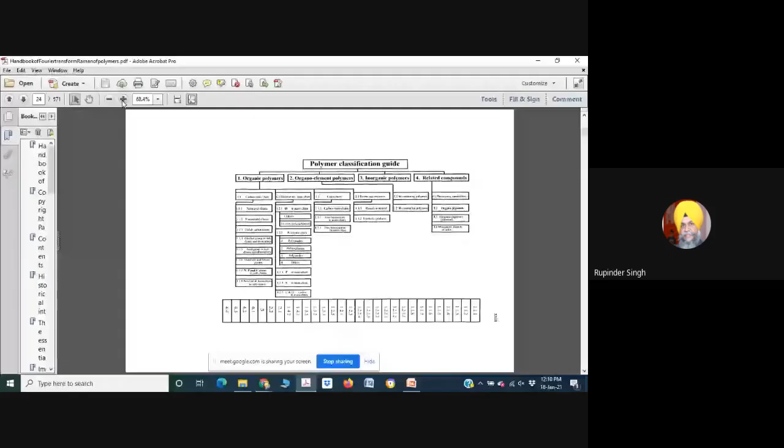Sir, you're telling Elsevier book only? Handbook of Fourier Transform Raman and Infrared Spectra of Polymers. Yeah, you just see this. Can you see this PDF? Yeah, sir, polymer classification guide. So this guide is basically helping me.

They have made some series, and you can see some numbering is there. So accordingly, whatever reinforcement you are making, and what sort of peak and bonding it will be giving, it is already in the form of the handbook. So this will help you, I suppose.

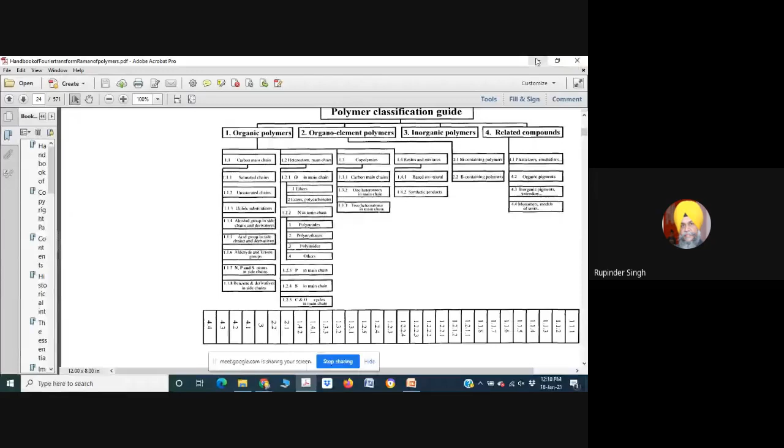Sir, is it there in that particular handbook? Yes, yes, it is very much there in the handbook. Okay sir, thank you very much.

So do we have any more queries? Sir, if you allow, we can take up the last one. What is the scope for getting a functionally graded material plate having a metal and ceramic combination, and what is the economical aspect?

Scope for preparing FGM, functionally graded material plate with metal and ceramic combination - which process do you want to use? 3D printing, for 3D printing they are asking. You are interested in functionally graded material through the metal printing route or through the polymer printing route - which route do you want?

They want to have a plate of FGM with a metal and ceramic combination. We can have it through two routes - one is through polymer printing, and second is through metal printing. Let me explain how. For example, you can have a polymer based master, and then investment casting. You can have a multiple stage investment casting, which will definitely be cheaper.